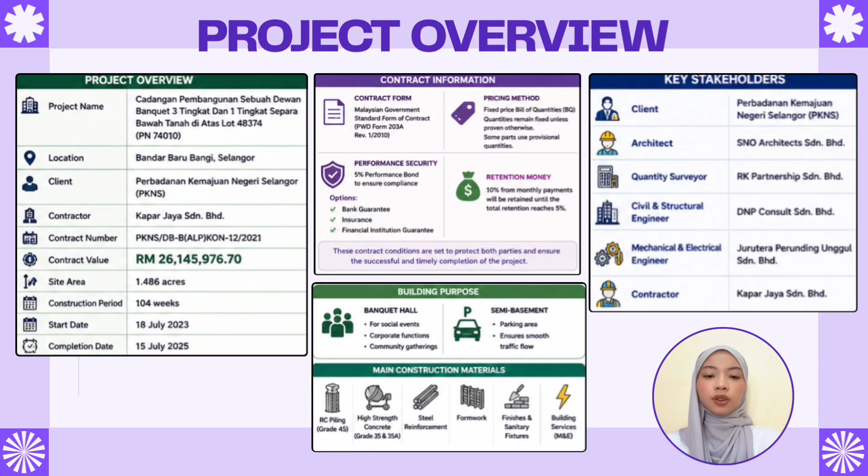It also includes a 5% performance bond and 10% retention money to ensure the contractor completes the work according to the contract. The main purpose of this building is to provide a banquet hall for social events, corporate functions, and community activities. The semi-basement is used as a parking area to improve traffic flow. The main construction materials include reinforced concrete, steel reinforcement, formwork, finishes, sanitary fittings, and mechanical, also electrical services.

Moving on to our work breakdown structure or WBS, we've broken the early stages of this project into two primary works packages to ensure a smooth, compliant, and structurally sound start. Our official project commencement is on July 18, 2023, beginning with phase 1, which is possession of site and preliminaries. Day 1 was strictly dedicated to formal site possession.

Following that, we allocated a 10-day window focused entirely on administrative safeguards, securing critical insurance, executing performance bonds, and obtaining approvals from the superintending officer, which is SO, to ensure we are 100% legally covered. Once cleared, the team spent 15 days on site mobilization. This involved setting up our temporary site office and routing initial utilities like water and electricity, so the site is fully operational.

Finally, we conclude this phase with a 10-day period for site clearing and topsoil stripping, removing all organic matter to prepare the raw earth for structural loading. With the site officially prepped and cleared, we immediately transition into the heavy civil works, which is piling and foundation works. This is where we begin building the literal backbone of the project, broken down into 5 distinct steps.

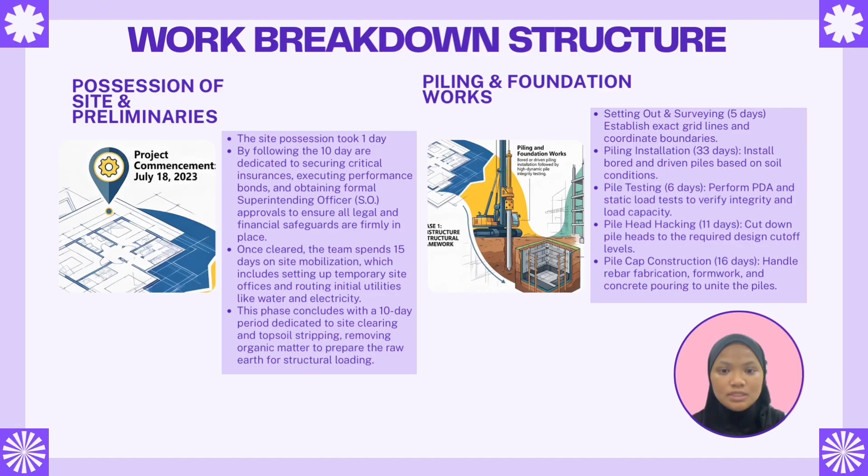Now that the foundations are securely in place, we move into the vertical and sub-phases of the project. This brings us to phase 3, which is sub-basement works, which builds our underground infrastructure over 4 steps. We begin with excavation and shoring, a 16-day process where we remove earth to the required depth while simultaneously installing a structural shoring system to hold back the surrounding soil and prevent cave-in.

Next is basement waterproofing, taking 6 days. Here we apply a comprehensive waterproofing membrane system to completely protect the underground structure from groundwater penetration and hydrostatic pressure. Following waterproofing, we move into main slab and retaining wall casting, which spans 25 days. It incorporates the heavy concrete basement floor slab and the thick perimeter concrete retaining walls designed to resist external soil and water pressure.

We conclude our sub-basement works with column and upper slab pouring over 15 days. This step involves casting the vertical concrete columns and the overhead basement slab, which effectively completes the sub-basement enclosure and serves as the ground floor platform for the building above. With the ground floor platform finalized, we rise above ground level and transition into phase 4, which is structural building works. This is where the main skeleton of the building takes shape floor by floor.

For the first floor, structural works take 33 days. This involves setting up the formwork, tying steel rebar, and pouring concrete to construct the columns, beams, and the overhead slab for our first elevated level. Next, we mirror this process for the second floor structural works over 32 days. We repeat the iterative casting cycle on this next level up, allowing the structural loads to safely transfer down to our cured lower frame.

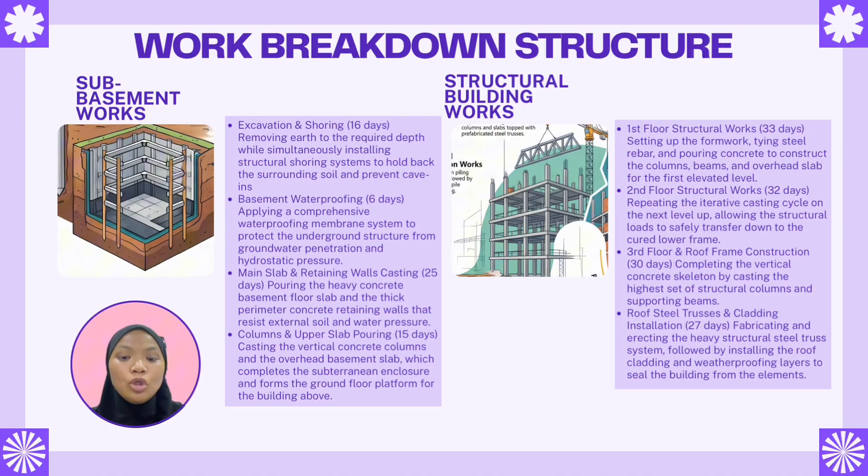Finally, we top off the structure with roof steel trusses and cladding installation, a 27-day process. During this time, we will fabricate and erect the heavy structural steel truss system, followed immediately by installing the roof cladding and weatherproofing layers to completely seal the building from the elements.

Once the building is weatherproof, we move indoors for floor finishing installation over 39 days, where we will lay down high durability tiling and specialized wood parquet. Concurrently, we will spend 25 days on the detailed banquet hall ceiling installation, crafting its decorative plaster ceiling.

Finally, we wrap up these phases with 32 days of internal and external painting to give the project its finalized polished look. Next, let's look at the mechanical and services phases. This is the nervous system of the building, ensuring everything is safe, efficient, and comfortable for future occupants.

We begin behind the scenes with first fix routing and conduits, 58 days hiding the core piping and electrical cables within the walls and slabs before they close up. Then we spend 40 days on centralized HVAC installation, integrating the heavy plant machinery and ductwork. Safety and mobility come next, with 32 days dedicated to fire protection and elevator systems.

Once the core systems are in, we spend 55 days on terminal devices fitting. This is the installation of everyday items like switches, fixtures, sanitary wares, and the PA system. We close this phase up with 17 days of rigorous testing and commissioning to ensure it complies with regulatory codes.

Finally, the project completion and handover. This is the closing stretch of our timeline, focusing heavily on quality assurance and formal delivery. We start with the 22-day joint defect inspection, working alongside the authorities and the superintending officer to log and fix any final snags. Next is 10 days of final site cleaning, a deep clean to clear away all industrial dust and construction debris.

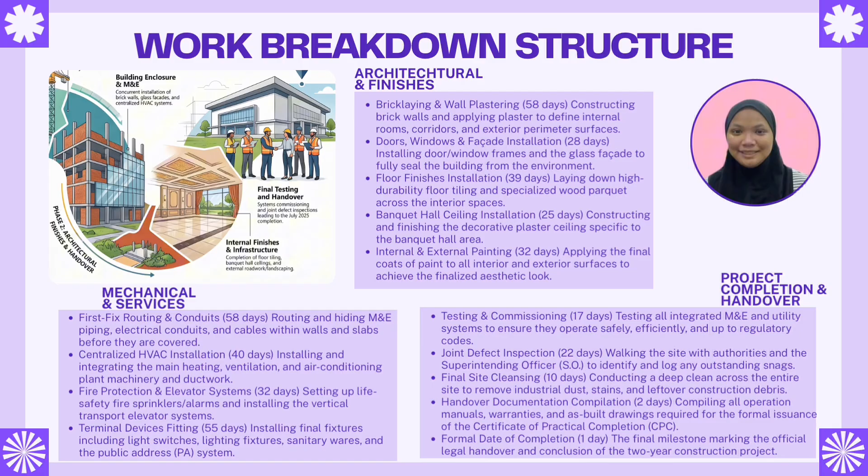Next, I will explain the first parts of the work program. The project starts with possession of site and preliminaries, where temporary facilities like site office, utilities, and safety measures are prepared. After that, site clearance and topsoil stripping are carried out before starting the piling and foundation works.

The project then continues with pile testing, pile cap construction, ground beams, and reinforced concrete works. Next, the sub-basement works are completed, including excavation, basement waterproofing, retaining walls, and the basement slab. These activities provide a strong foundation before the main building structure works begin.

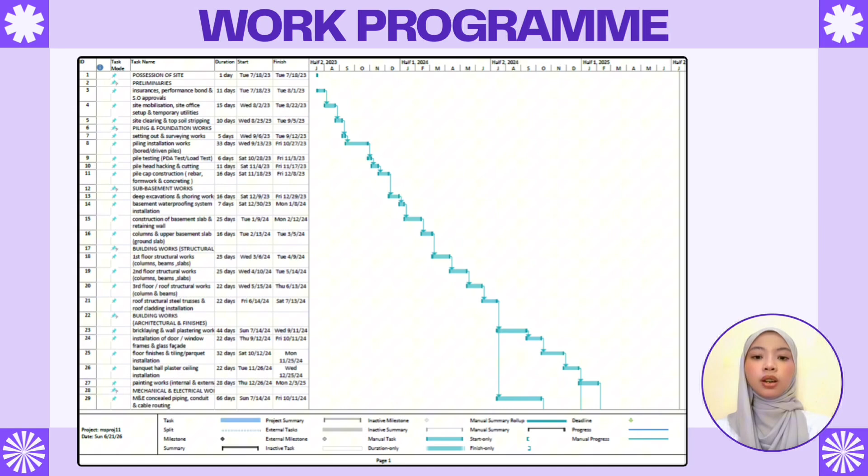Then we continue with the superstructure phase. This includes the construction of the columns, beams, floor slabs, roof structure, and roof cladding. Once the structure is completed, the project moves to architectural finishes such as brick walls, plastering, doors and windows, floor finishes, ceiling works, and painting.

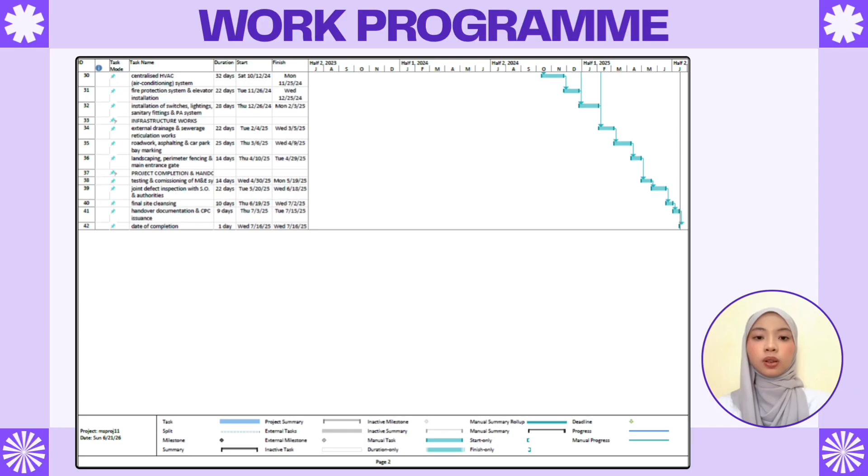At the same time, the mechanical and electrical services are installed, including the electrical wiring, plumbing, sanitary fittings, and air conditioning system. Finally, the project ends with testing and commissioning, final inspection, site cleaning, and handover to the client. This works program helps ensure that the activities are completed in the correct sequence within the 104-week construction period.

Assalamualaikum. My name is Nur Anas Suhaila, and today I will present the cash flow management during the pre-construction stage.

Cash flow management is important because it ensures that the contractor has sufficient funds before construction begins. It helps the contractor manage important expenses such as project mobilization, labor, material, equipment, insurance and temporary facilities. With proper cash flow management, the contractor can reduce the risk of cash shortage and avoid delay during construction.

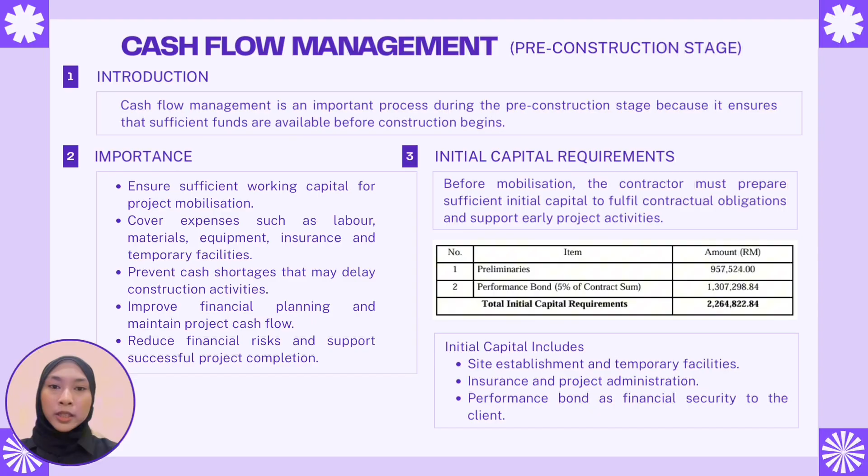Before mobilization, the contractor also needs to prepare the initial capital for this project. The total initial capital required is 2.26 million, which includes the preliminaries and the performance bond. These costs are necessary to ensure that the project can start smoothly.

Next, I will explain the source of finance for this project. The total contract sum is 26.15 million. To finance this project, the contractor used both internal and external sources of finance. Internal financing contributes 40%, while external financing contributes 60% of the total project cost. The internal sources include retained profit, share capital and depreciation provision. These are funds generated within the company.

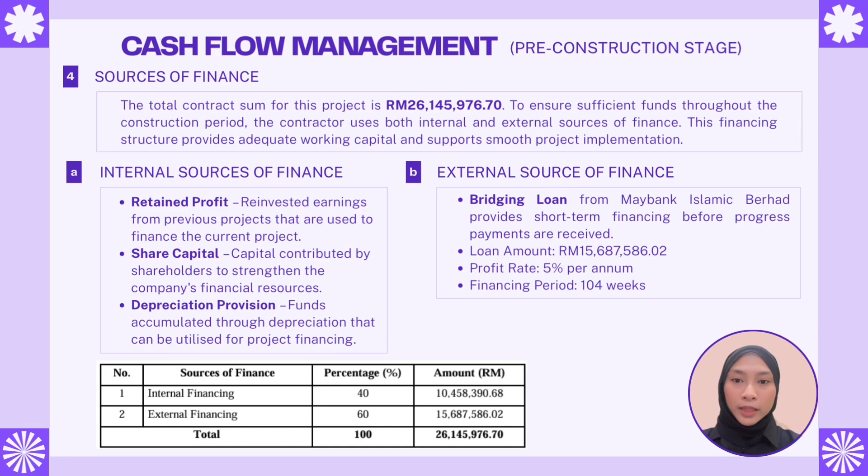Meanwhile, the external source is a bridging loan from Maybank Islamic Berhad, which provides additional working capital before progress payments are received from the client. This financing structure helps ensure that construction activity can continue without financial interruption.

Next, I will explain the strategy for managing financial risk before project mobilization. There are several important strategies that the contractor should implement. First, financing should be secured early to ensure sufficient working capital before construction starts. Second, a cash flow forecast should be prepared to estimate future cash inflow and outflow.

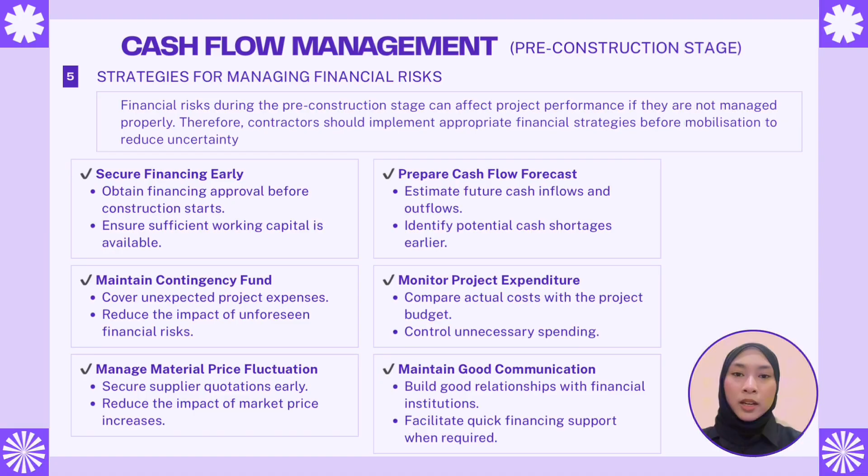The contractor should also maintain a contingency fund to cover unexpected expenses and monitor project expenditure regularly to avoid overspending. Besides that, managing material price fluctuation and maintaining good communication with financial institutions can help reduce financial risk. This strategy helps ensure that the project runs smoothly throughout the construction period.

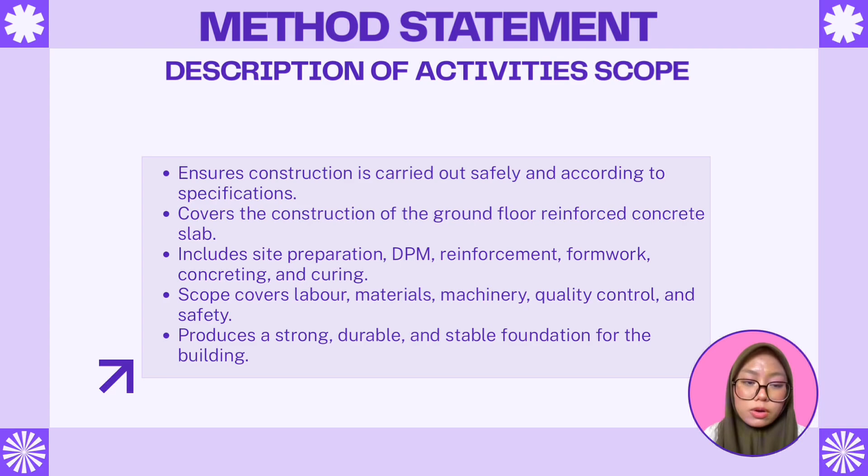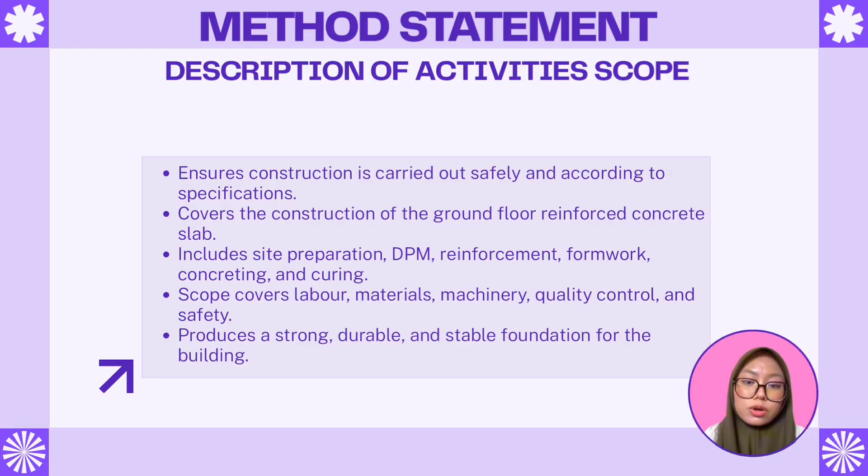The work includes site preparation, installation of the damp-proof membrane or DPM, reinforcement fixing, formwork installation, concrete casting and curing. The scope also covers the required labor, materials, machinery, quality control and safety measures. Overall, this activity helps produce a strong, durable and stable foundation for the building.

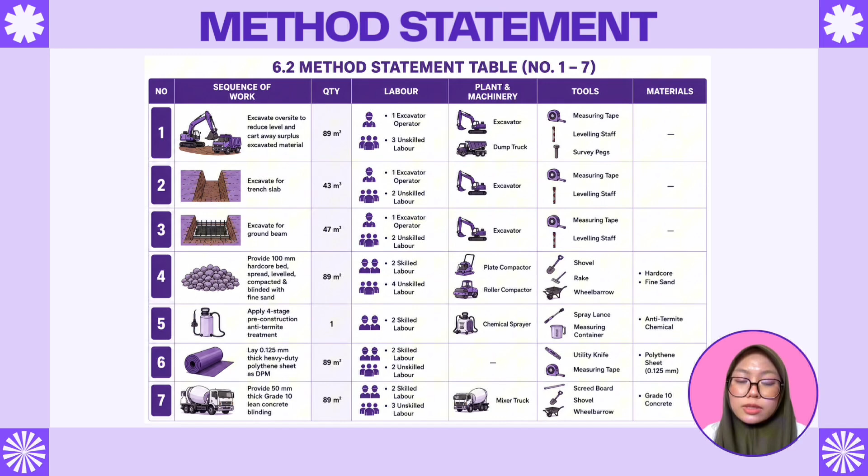Then, a 0.125 mm heavy duty polythene sheet is installed as the damp-proof membrane or DPM to prevent ground moisture from entering the slab. Finally, a 50 mm thick grade 10 lean concrete blinding is placed to provide a clean, level surface before reinforcement and structural concrete works begin.

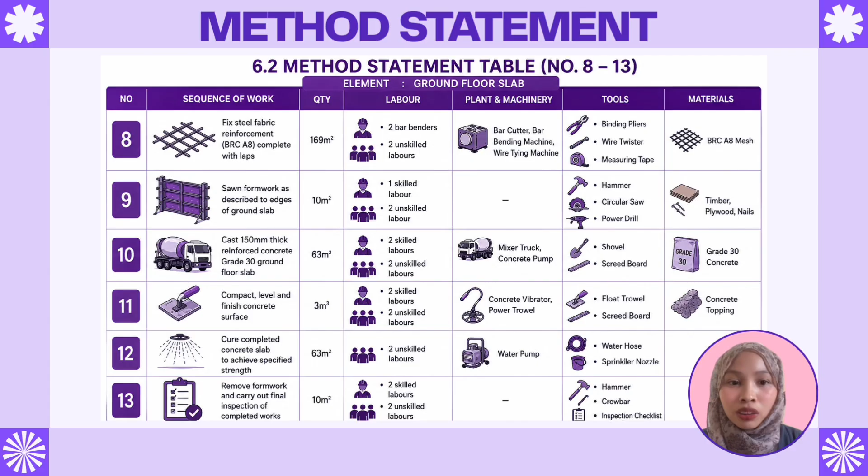Next, a 150 mm thick grade 30 reinforced concrete ground floor slab is cast using a mixer truck and concrete pump. After concreting, the slab is compacted and finished using a concrete vibrator and power trowel to achieve the required surface quality. Finally, the concrete is cured to ensure sufficient strength before the formwork is removed, and a final inspection is carried out to confirm that the completed ground floor slab meets the required project specification.

Next, I will explain the health, safety and environmental considerations for the construction of this project. The safety requirements were referred from the project BQ under the HSE and preliminary section. To ensure a safe working environment, the site must provide essential safety equipment including first aid kit, fire extinguisher, safety signages, and emergency exit sign.

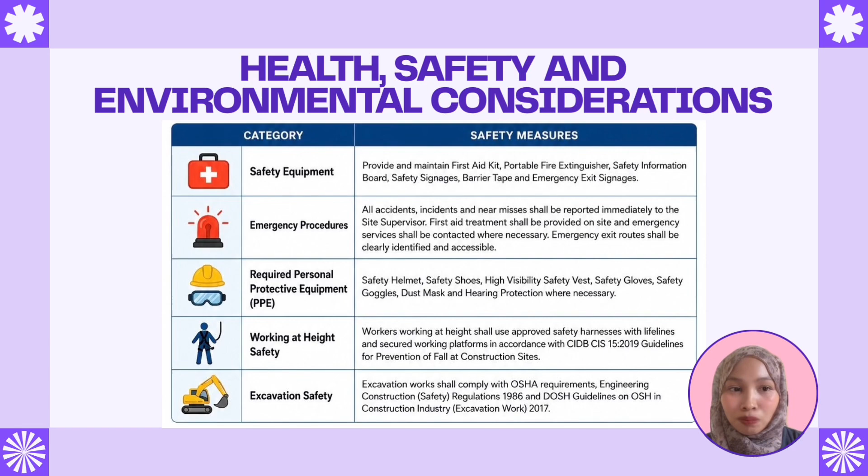All workers involved in the slab construction are required to wear appropriate PPE such as safety helmet, safety shoes, safety vest, gloves, and safety goggles. To ensure a safe construction site, all temporary works, including formwork, must be properly designed, inspected, and certified before use. Adequate traffic management, warning signages, and good housekeeping practice are also implemented to protect both workers and public while maintaining a clean and organized site.

In addition, environmental measures such as mosquito prevention, dust control, proper waste disposal, and site welfare facilities are provided to minimize environmental impact and ensure workers' well-being. Finally, all construction activities must comply with the Occupational Safety and Health Act 1994, the Factories and Machinery Act 1967, CIDB safety guidelines, and the approved site safety and health plan to ensure the project is completed safely and in accordance with all relevant regulations.

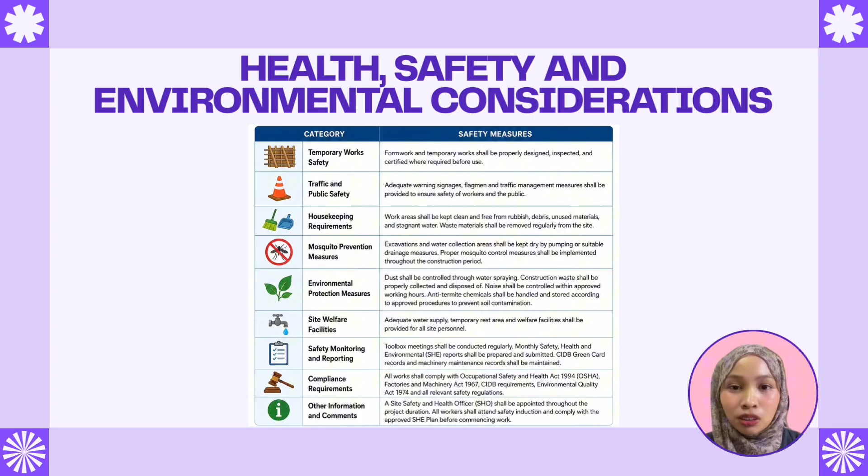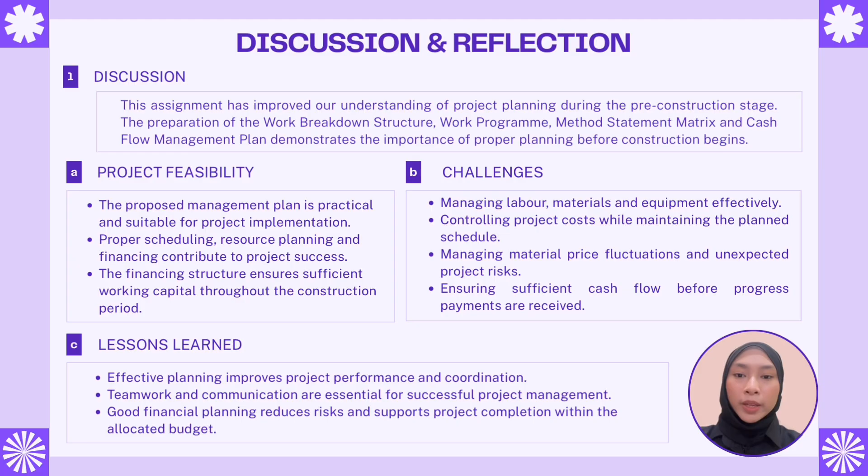Overall, the assignment has strengthened our knowledge of project management and highlighted the importance of financial planning to ensure a successful construction project.